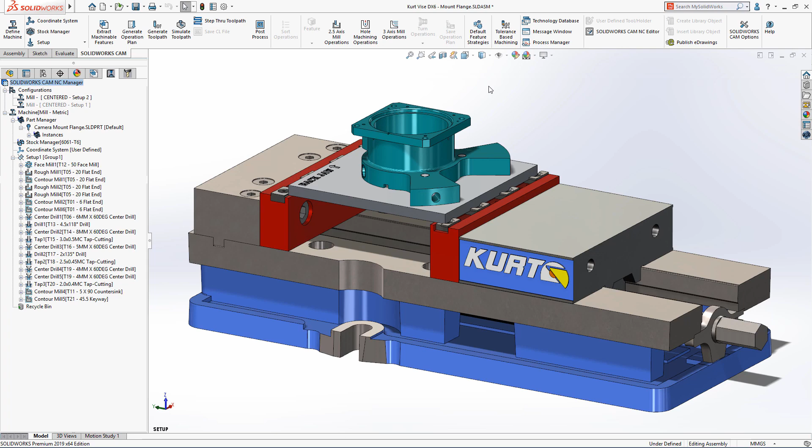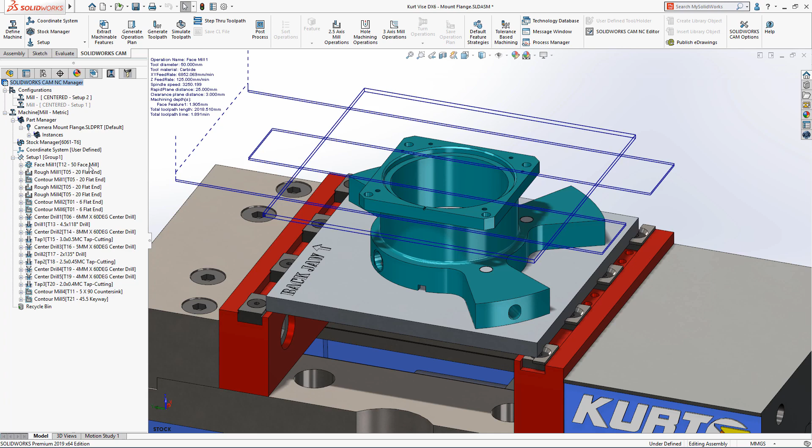SOLIDWORKS CAM 2019 delivers some great new features that will help you reduce the time it takes to program your parts. Configurations in SOLIDWORKS CAM are a great time saver that enable you to define multiple manufacturing setups within a single part or assembly. 2 configurations, each containing their own unique set of manufacturing operations, have been defined in order to machine the front and rear flanges of this camera mount part.

Switching configurations to setup 1 reorientates the part and changes the operations tree to display only the operations unique to this setup. To finish programming the camera mount, we're going to make some changes to the contour milling operation for the outer faces. As the straight tool gets to the bottom of the part, there's a risk that the shank will touch some of the faces at the top that were already machined earlier in the operation, spoiling the surface finish. SOLIDWORKS CAM 2019 adds new taper and neck options for the non-cutting portion of a tool.

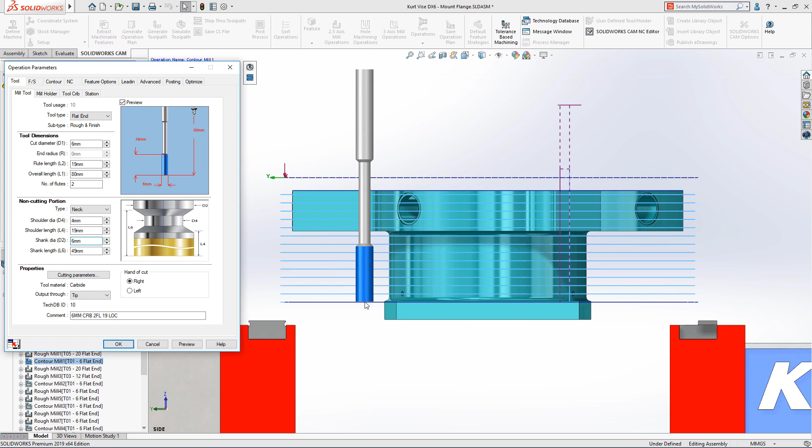For this operation, we'll change the type to neck and then specify the size of first the tool neck, followed by the tool holder. As sizes are inputted, the preview of the tool updates in the graphics area, showing the new tool and holder shape in relation to the part, so you can now predict the final result with even greater accuracy.

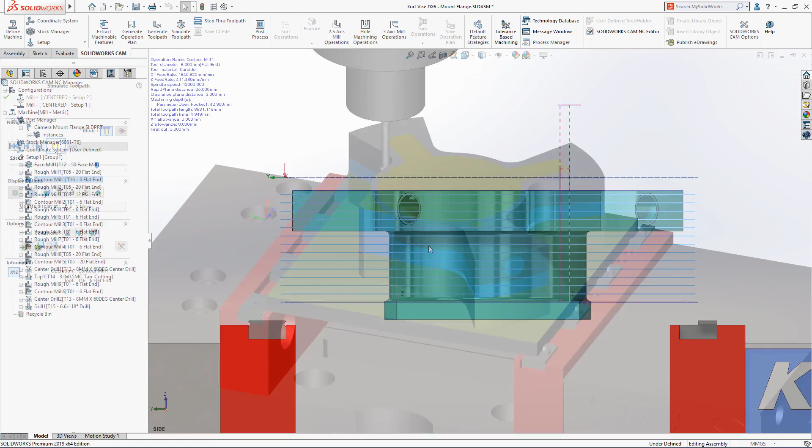Another great enhancement for 2019 is the addition of the new corner slowdown option. By enabling corner slowdown, you can now vary the feed rate based on distance, resulting in increased tool life and improved surface finish.

NC programmers using multiple machine tools can now take even greater advantage of SOLIDWORKS CAM's powerful automation capabilities. The technology database now provides you with the option to define multiple machining strategies and assign them to a specific machine. The remaining features of this camera mount are going to be machined using a 4-axis rotary table. 3 different sets of machining strategies have already been predefined in the database, including one for a 4-axis rotary table. Selecting the 4-axis rotary set displays the list of its unique features and operations.

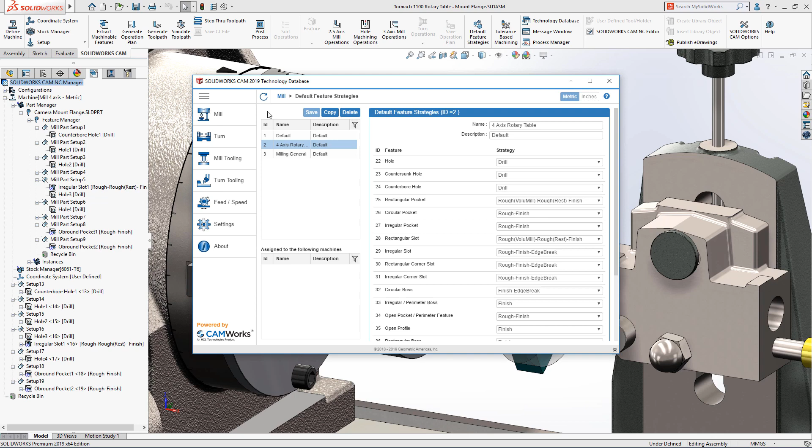We'll go ahead and make a couple of changes by setting the rectangular corner slot and circular boss to use rough finish edge break operations, then saving to update the overall strategy set. After switching to view the properties of the 4-axis machine tool, the 4-axis rotary strategy can be chosen as its default machining strategy. By using this machine in combination with SOLIDWORKS CAM's automatic feature recognition, an optimized set of operations will be automatically generated.

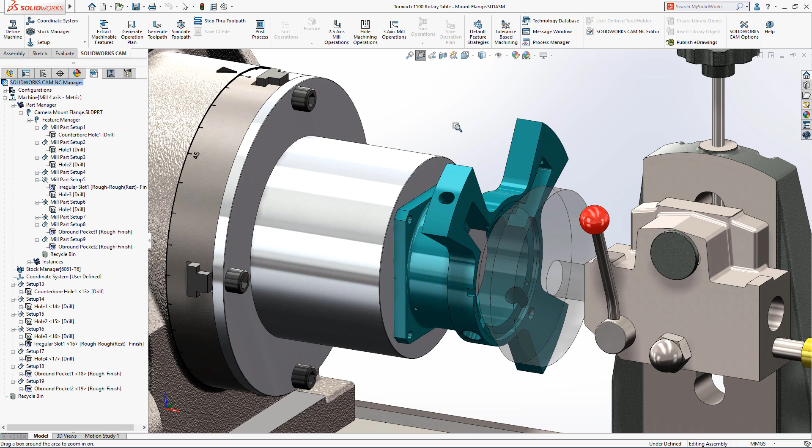SOLIDWORKS CAM 2019 also adds some great productivity enhancements for creating everyday machining operations. For example, new options to control hole start and end position provide much greater flexibility when you're defining drilling operations. Now you can set an offset to feed in from a specific distance and drill to a specific position regardless of feature size, eliminating the need to create any extra construction geometry.

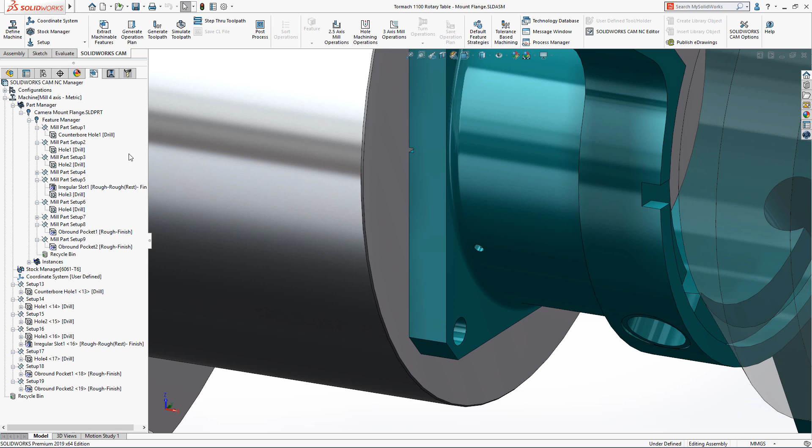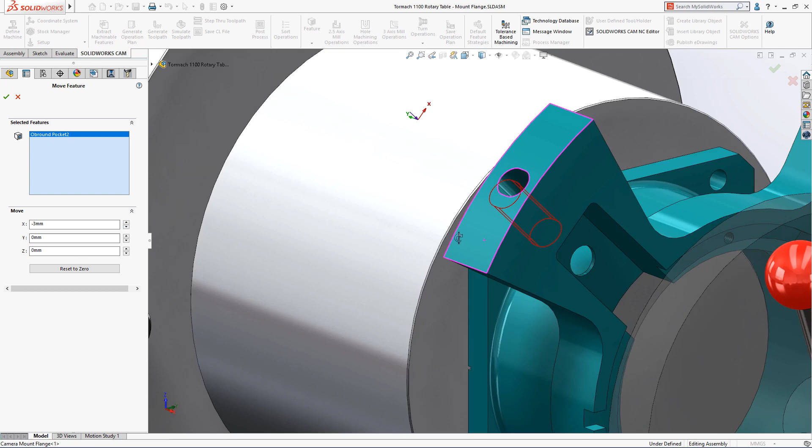When having to meet strict tolerance requirements, it's often necessary to offset the position of a toolpath in relation to the model geometry. Even small incremental adjustments can result in time-consuming workarounds, for example, manually editing the NC program or even changing the model geometry. In SOLIDWORKS CAM 2019, you can now change the position of machined features using the new Move command. Features can be moved in X, Y, and Z, providing a great way to easily machine to mid-tolerance without the extra rework that's often necessary.

Those are some of the fantastic new features in SOLIDWORKS CAM 2019 that can help you improve quality and reduce the time required to generate NC programs.